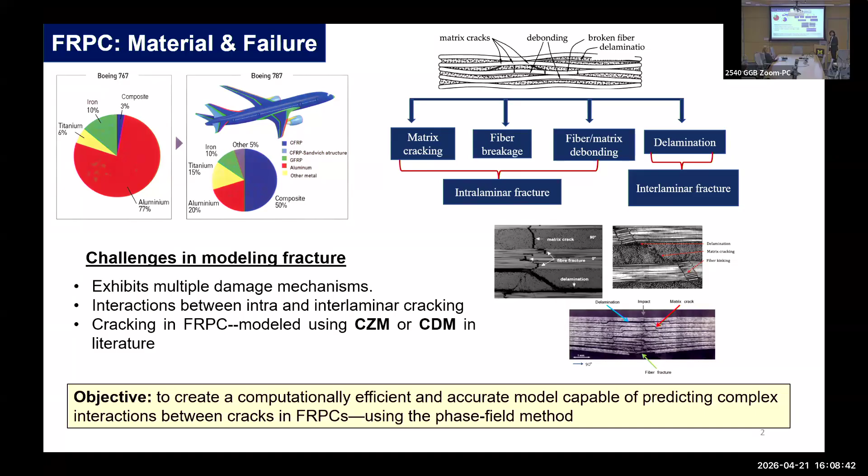So our objective in this project was to develop a computationally efficient and accurate model capable of describing all these complex features of the fracture behavior of fiber-reinforced composites. For that, we will use the phase field fracture method. I'll explain in a minute why phase field fracture is particularly suited to solve this problem.

Prior to that, let's talk very quickly about the unidirectional FRPC constitutive behavior. As you can see here, it's a schematic representation. The unidirectional FRPC, or UD-FRPC in short, has a stress-strain response that depends on the fiber orientation with respect to the loading axis.

Similarly, if you look at the fracture behavior—this experiment was done here at University of Michigan in Professor Waas's lab—they considered an open hole tensile sample with fiber oriented at different angles with respect to the loading direction. These are open hole tension samples, pulled along the horizontal direction, and you can see the crack starts from the notched edge and then propagates following the fiber path. So it's a highly anisotropic phenomenon even when the external load was purely tension dominated.

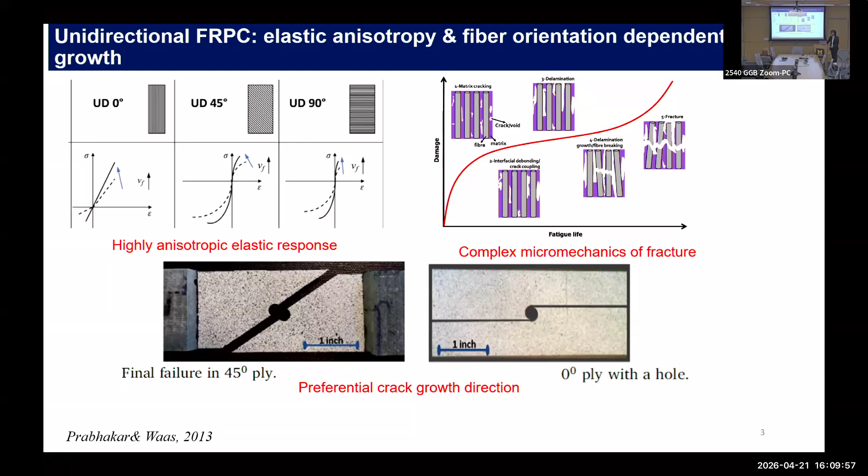Characterizing and incorporating that in a modeling environment has been challenging. Cohesive zone models have been used as a recourse, but there were issues.

So we are trying to handle some of them through this phase field approach. Before going to the phase field description of fracture, very classical inception of fracture mechanics started with Griffith's theory

of fracture, which basically states a condition of when the crack will grow in a linear elastic brittle material. It gives basically an energy balance sort of statement to determine that criteria, which states that when the elastic energy or the stored strain energy released per unit area of crack equates the material's fracture resistance, or formally known as fracture toughness, then that determines the unstable crack growth criteria. This was very simple and widely applicable to describe the fracture behavior of brittle material.

Based on that Griffith's seminal work, there have been a significant volume of work in fracture mechanics because it's challenging to deal with as the material constitutive description changes from brittle to ductile, then heterogeneity and anisotropy, etc. So I borrowed a famous quote by Professor Bazant that, like turbulence, fracture mechanics is different.

This formidable subject has been researched for a century and probably will be for another, because there are still quite a lot of unresolved issues.

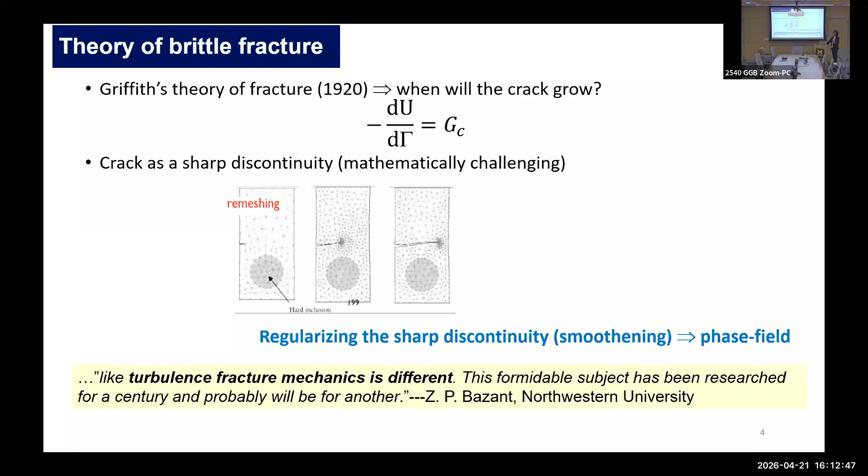And phase field framework of fracture actually lies in that domain of fracture modeling. So smoothening the sharp discontinuity, that's the core idea of representing sharp crack through phase field.

So now jumping into the core description or the theory of phase field, which basically started as a formal variational theory of fracture, and the seminal work was by Francfort and Marigo in the late 90s, who recast the Griffith's statement of energy balance in the form of energy minimization.

So if you can write the total energy of a cracked body, which contains the bulk stored elastic energy, and then a fracture energy term, which is balanced with the external work, and then if you can minimize this energy somehow, then the crack path, the propagating crack path, emerges naturally from the solution of this minimization problem.

So the two key points that we need to focus here: remember the fracture energy is described over the crack surface area, whereas this bulk elastic energy is integrated over the volumetric domain. So it's basically one over the surface area term, and this one is the bulk volumetric term. Theoretically it was possible, but numerically it was quite challenging to implement until this late 2000s work came up.

Where the description of this order parameter, which is more formally known as order parameter in the broader domain of phase field approximation, basically was introduced to describe the damage field. So a sharp crack is represented by this.

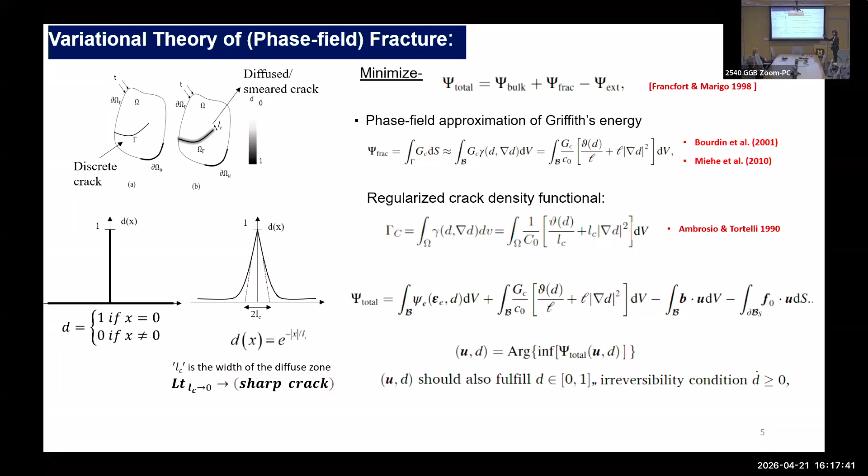Of course, along with that, this implementation further demands criteria like the damage being irreversible. No healing is possible once the crack is happening, because we are not solving any dissipation inequality here, it's just energy minimization. So there is a possibility that if we are doing an unloading, the crack can heal. So we have to impose this constraint from outside the variational principle. So this was the core of this phase field fracture theory.

Now we tried to extend the classical phase field theory to model fracture in FRPC composite. That was our sole motivation. So along with the sharp crack approximation, as I said before, most of these fiber reinforced composite materials are used in laminate forms, and these laminates often have off-angle lamina orientation. So they have fiber orientation mismatch, and that mismatch actually gives rise to this interface.

So even without any crack at the interface, just because of this mismatch of fiber orientation, there is a displacement discontinuity along those mating surfaces. Any sharp discontinuity again troubles our continuum mechanics approximation and the solution.

So what we did is, just like the phase field approximation, we used another smoothing scheme to smoothen out these sharp interfaces. So we had D priori to describe the sharp crack. Now we have beta, which is also a phase field variable. The difference between D and beta is that beta does not evolve with time. So it's a fixed scalar smoothing variable which varies between 0 and 1. 0 represents the bulk material, 1 represents the sharp interface.

So if you just think of the ideal schematic of this smoothing phenomena, you have a sharp crack in the domain and you have a sharp interface, both can be regularized by introducing the phase field variable D and beta and an associated length scale parameter. So with that introduction of beta and D, now my total energy in a regularized form for the domain can be written like this.

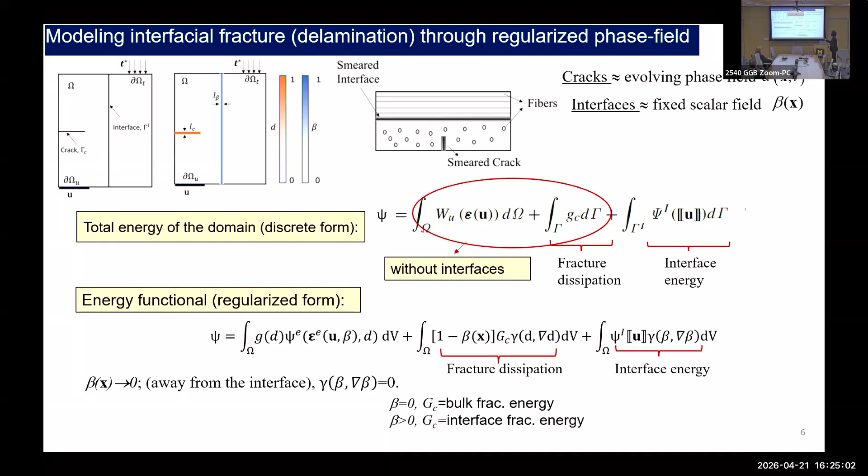So that was the interface description. In addition, if you remember in the free energy expression from a couple slides before, I did not explain this: the interfacial free energy is classically expressed based on a displacement jump, because there is a displacement discontinuity along this mating interface between two successive lamina. This displacement jump used to be the most important kinematical variable in classical theory, so the free energy is expressed as a function of this displacement jump across the sharp interface.

Now the idea we are borrowing in this phase field framework is that we get rid of all sorts of sharp discontinuity. To do that, we approximate this displacement jump across the interface using a simple trick: a first order Taylor series expansion of the displacement field across the neighborhood of this separating interface. It's fairly simple, but there's a catch: since it's a Taylor series expansion over the nearest neighborhood, we have to choose this distance h over which we do the approximation to be small enough so we don't get a very rough jump approximation.

This automatically comes because we actually smoothened the interface field too, through the introduction of the beta parameter. So we need a smooth approximation for beta anyway, which tells us we need to resolve our mesh fine enough so that this jump approximation remains accurate. So now we have a smeared crack, a smeared interface, and the jump across this interface is also smoothened out - there is no sharp discontinuity anywhere in the domain.

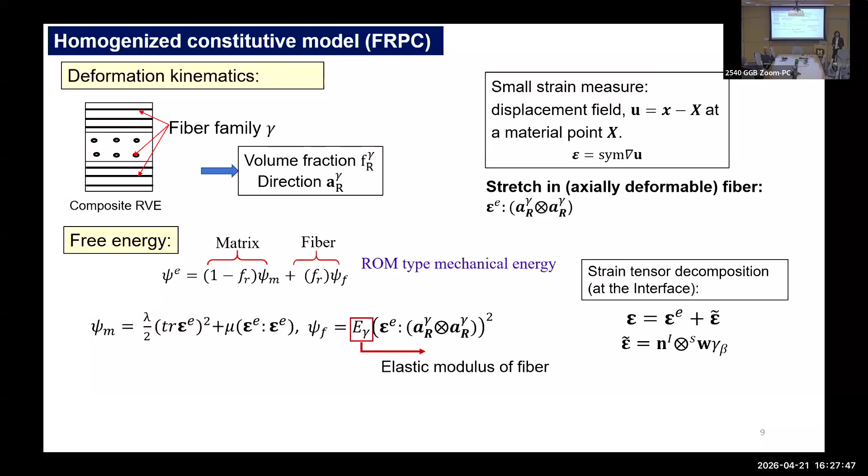With this very simple constitutive description, we went ahead and applied the variational principle to get the governing equations. So we have the classical stress equilibrium and, of course, the phase field equations.

Here we have done quite a bit of manipulation. I'm not going into the detail because you can find it in our recent papers. But again, reminding you that this 1 minus beta term basically takes care of this interactive fracture phenomena.

So if the crack traverses from bulk to the interface and then interface to the bulk again, this term is going to dictate how the fracture energy will change as the crack path changes.

And of course, remember that important constraint that damage cannot heal once it happens. So we used this history function-based approach.

There are still some unresolved questions in the phase field methodology of using this history-based approach. That is, H is called the history function-based approach. But for the time being, we are using this one because it is fairly easy to deal with.

There are other approaches, for example, Lagrange multiplier-based approaches, to introduce this constraint and make it an equality constraint, and then solve the whole differential equation. That could be another way.

So then, of course, H from the construction itself is the maximum of the history of the elastic strain energy, factored by a term which basically acts as a threshold.

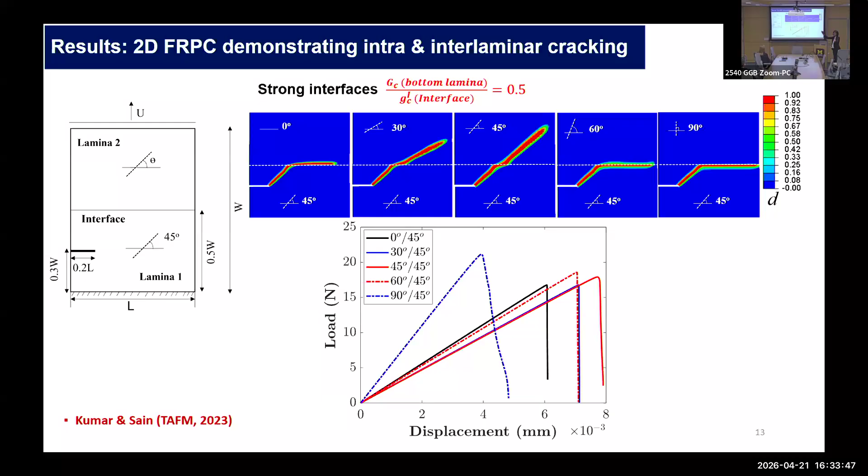So if anyone is trying to design a composite where you want a predefined crack path, like how you want the cracks to maneuver, you can probably use one such model fairly easily and design the layup to control how you want your crack to propagate in a composite domain.

So we extended our implementation for 3D geometry, because that is where you basically exploit the entire loading spectrum for realistic composite applications. We used similar geometry and similar notch locations, but tried different modes of fracture and different modes of external loading. I'm going to show a few specific case studies. For more details, you are welcome to look at our recent papers.

In this particular slide, I'm showing the case when the interface toughness is weaker than the bottom laminar toughness. You see what is happening: the crack starts at the notch tip, the damage starts at the notch tip, but it does not propagate. Instead, another crack starts at the interfacial delamination location, and the delamination continues to propagate. So delamination becomes the dominant failure mode.

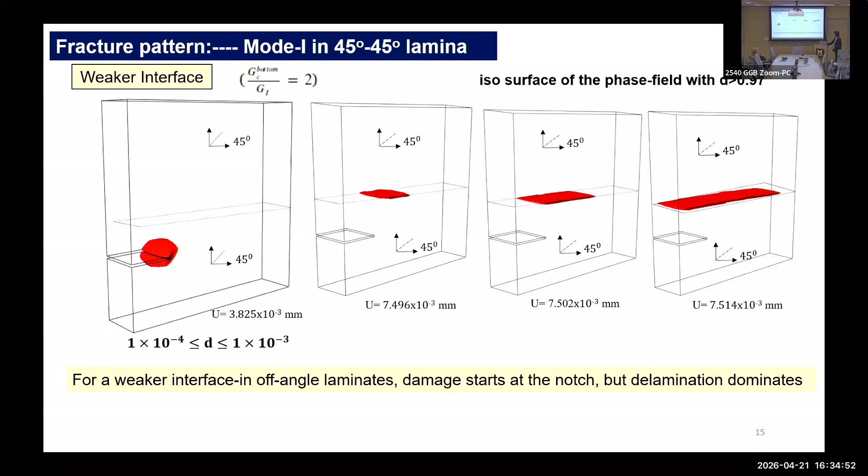So if the interface toughness is weak, then you will always see delamination, at least under this uniaxial tensile loading condition. This is mode 1 loading, okay?

However, if the interface is stronger, again I showed you some results in the 2D case. We have done the same experiments in 3D, and we have seen similar results: up until about 45 degrees, it starts from the notch tip, follows the bottom fiber orientation, goes to the interface, remains there for a while, and then follows the top fiber orientation.

But at 60 degrees and 90 degrees, it goes to the interface and interfacial delamination is favored. Of course, the resulting phenomena that we are seeing is a competition between the individual toughness of the lamina and the toughness of the interface.

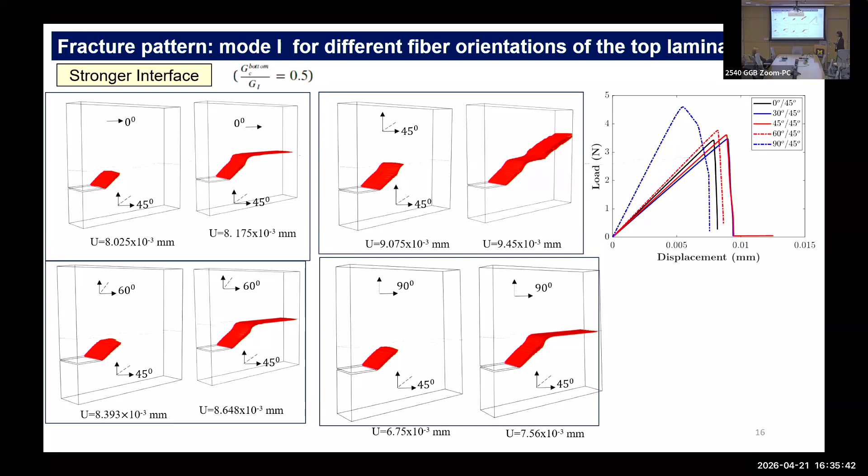Okay, so this is for other modes of fracture. Here, the top and bottom fiber orientations are both 45 degrees. What we are studying is how the crack will propagate under different modes. This one is particularly interesting.

So what we saw for mode 2, in-plane shear, is that the fracture path depends on where the pre-notch is. If the pre-notch is at the mid-plane, where the interface is, then we see pure delamination. If the pre-notch is offset with respect to the interface, then we see inclined crack propagation, almost as if it doesn't even realize the presence of the fiber. If it was pure matrix-driven crack propagation, you would have seen a crack path like this.

Now, we don't know whether this is actually happening in experiments in all cases. This requires rigorous experimental validation. We did some validation, and of course, depending on what type of fracture behavior is happening, our load displacement curve also shows significant change, which is quite expected.

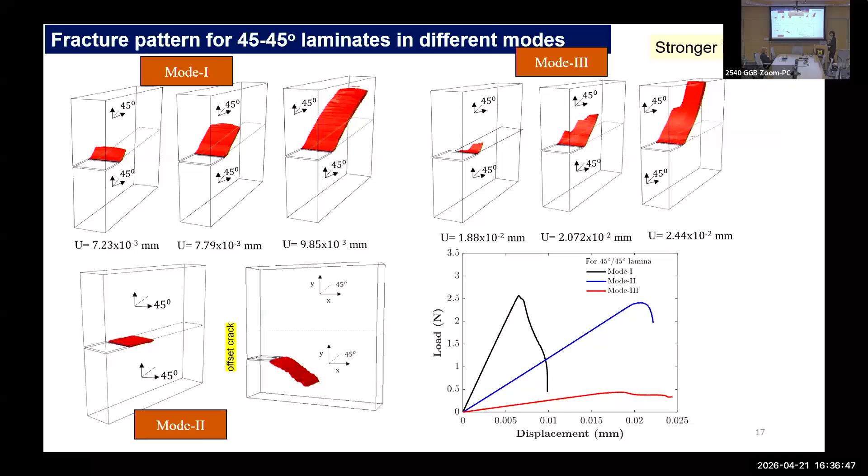So this is the part that we have already published. To give a quick summary: the anisotropic regularization we introduced in the gradient term of the fracture energy works well to characterize this fiber-oriented, preferential crack growth. The homogenized constitutive framework was used to incorporate the elasticity, and the regularized interface approximation works well to capture the delaminations.

We have done quite rigorous experimental validation in the papers. I showed you the OHT experiments before. We have also done some interfacial delamination experiments like the DCB or end-notch fracture experiments reported in the literature, and our model predictions agree fairly well with the reported experiments. These are the papers where you can get more details on this part of the work.

Now I am going to switch and show you the recent modifications that we are thinking of doing. This part of the work is not published yet, it's under review.

The first change we are going to do is the constitutive description of the lamina. Instead of using that homogenized, axial stretch dependent behavior for the fiber kinematics, we are going to look into a more orthotropic sense of the constitutive behavior. This is bread and butter for the composite community, right?

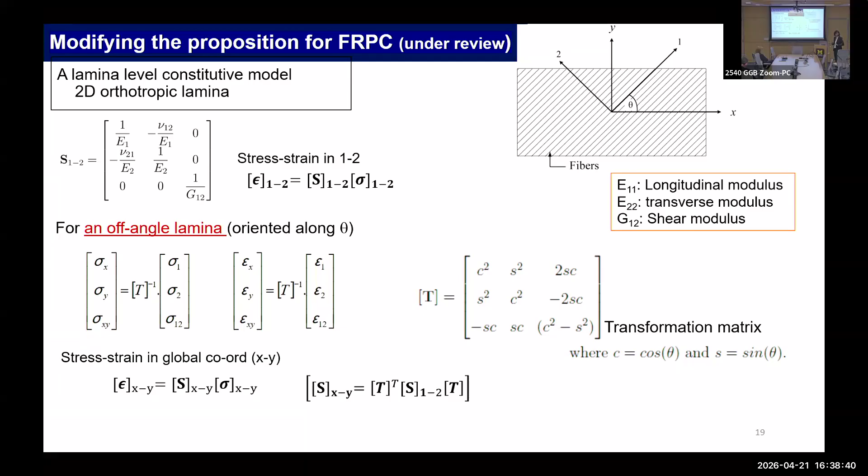So in 2D, this is what the elasticity matrix looks like in the local material coordinates. One is actually the longitudinal or fiber direction. Depending on theta, you can do a simple stress-strain transformation to get the global stress-strain equation in the Cartesian coordinate system. That's what, as I said, in lamination theory people keep doing.

In addition, to calculate the driving energy for the phase field crack growth, we did some modification. What we are trying to say is that we know the crack propagates along the fiber direction, even under pure tension-dominated mode.

If we think the crack is to propagate under a pure mode 1 situation, then from classical fracture mechanics concept, we know that the stress perpendicular to the crack path is responsible for driving the crack. So if the crack has to propagate longitudinally under mode 1, the mode 1 driving energy should depend on the transverse stress.

We can simply write down a strain energy density based on the transverse stress and the transverse modulus, like this. Similarly, if the crack is to propagate under mode 2, then the shear stress and the corresponding shear modulus will be used to compute the shear energy part, or the mode 2 energy part of the driving force.

Of course we have to have these criteria to ensure that fracture happens only in tension-dominated situations. For the shear case, it depends on the principal stress calculation: if our major principal stress is greater than 0, it will be a non-zero term, otherwise it remains 0.

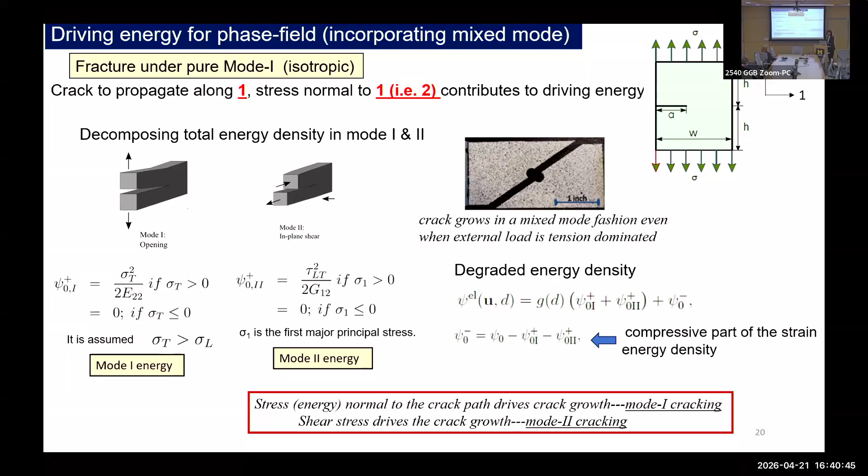With this, we went a little further. Along with quasi-static fracture simulation, we wanted to see what happens in dynamics, if we have high rate loading, impact loading, which is what composite people are often very interested in. So we basically implemented the system in the kinetic domain.

So we have a kinetic energy term in the total energy of the system. Remember what we changed here—recap—we did not introduce any anisotropic tensor in the description of the phase field fracture, which was done in the previous part of my work. That was not done.

We have a new history function because now we have two parts of the free energy, or elastic energy: mode 1 and mode 2. They are individually compared with respect to the two modes of fracture toughness to get the driving energy. So these were the changes done in the phase field setting of the work.

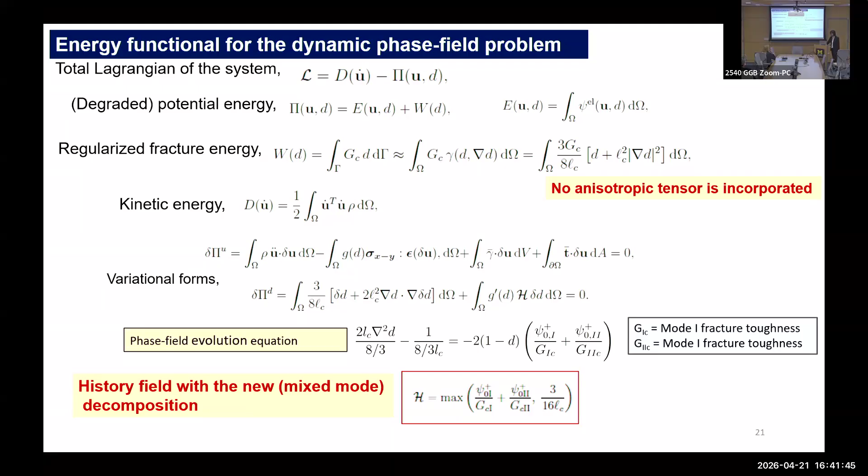Then, of course, we implemented—and I did not mention this in the first part—the numerical implementation still uses the Abaqus platform for the solver. We write a user elements routine, and for dynamics we use a Newmark beta algorithm. Those of you familiar with phase field literature know we have used a staggered implementation.

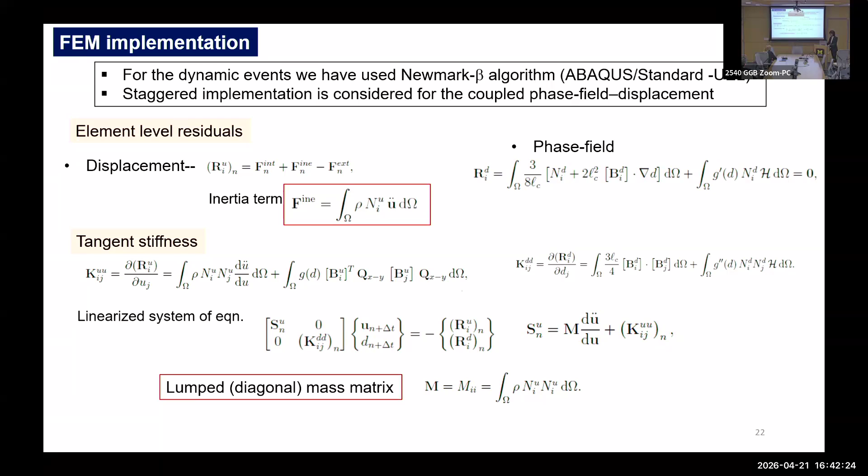I'm not going into the detail of the numerics here. The staggered implementation—basically, if you look at the whole potential, it's non-convex between U and D, so a global minimization is often very difficult to do, which is why we do the staggered implementation. If there is interest, I can talk more about that.

But then again, going back to the validation originally—I'm referring to Professor Waas's work quite a bit in this talk, because that was our benchmark problem, since all the material properties were listed in the papers.

It was very easy. When we went to the orthotropic description of the lamina, it was fairly easy to just use their material constants directly. I did not have to do any calibration, except the two fracture toughnesses. Those of you familiar with the phase field literature know the fracture toughnesses—basically the Ambrosio-Tortorelli type approximation used in the regularization of the fracture term—requires the fracture energy to be calibrated if we choose a specific length scale parameter. So either of them you can choose.

You can actually let the fracture parameter come from the experiments, and calibrate the length scale LC. But then you have to control the mesh dependency, because LC is used to resolve your crack surfaces, so it will depend on mesh size. Here, what we did is fix the LC depending on the mesh size. If we have a fine enough mesh, we can fix the LC and then calibrate the two toughnesses—that's all. Once we have that, our models are fairly accurate in predicting the experimental response across fiber orientations, and so does our predicted crack path, which matches the experiments fairly nicely.

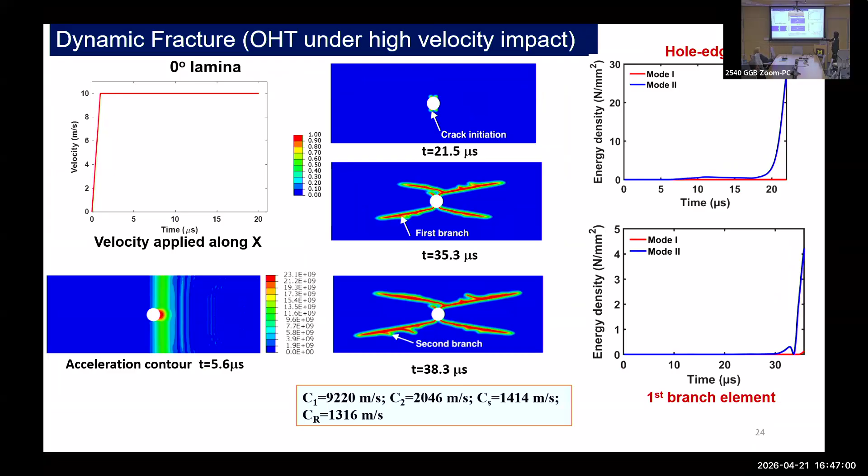So this is a compressive wave coming down, right? Yes, and it turns around, and that's when you see the crack. So when it goes here, the wave has reached around 5.6 microseconds, but there was no crack growth at that point. It goes and then comes back around this time period, and then you see the crack initiate. Yeah, you're right.

We continue doing this with a Kalthoff-Winkler type geometry. This is a classical example of dynamic fracture in isotropic material. Here, the idea is you have a specimen with two notches on one side, and you impact it with a compressive wave—a high velocity impact—between these two notches. To exploit the symmetry, we just model half of it, and consider different fiber orientations to see how the crack propagation changes.

So again, for the 0 degree case, we see that there is one single crack propagating horizontally. If we look at the energy spectrum or the local stress behavior, we see that it is purely shear driven, or mode 2 driven crack growth. So again, fiber matrix delamination is the dominant mechanism known for this 0 degree lamina.

If we try to characterize the crack propagation velocity by tracking the tip as it moves, we see that 5,000 meters per second is probably the unstable crack growth velocity, which is way higher than the shear wave speed in this particular composite. So yeah, we did not see any branching.

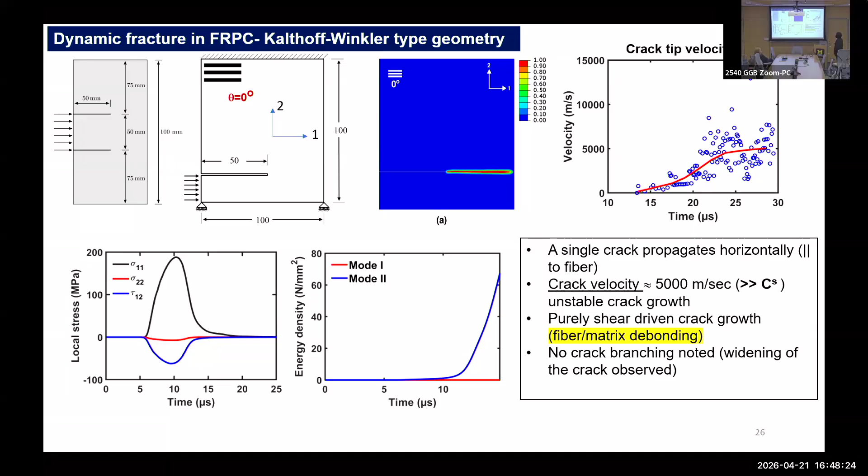Why I report that we did not see branching is because the moment we change the orientation to 90 degrees, we now see a significant amount of branching happening as the crack tries to propagate horizontally. Same boundary conditions, only the fiber orientation is perpendicular now. We see that the velocity of this horizontal crack tip has dropped quite a bit compared to the 0 degree case. Branching tries to happen parallel to the fiber direction.

We saw precisely that the first branching happened when the compressive wave went out and came back to this point. Here is the acceleration snapshot and the corresponding phase field evolution. When the first wave hit here, we see very minimal propagation as it continues. Remember, this part is purely shear driven, so the propagating wave is essentially compression. No normal crack, just shear.

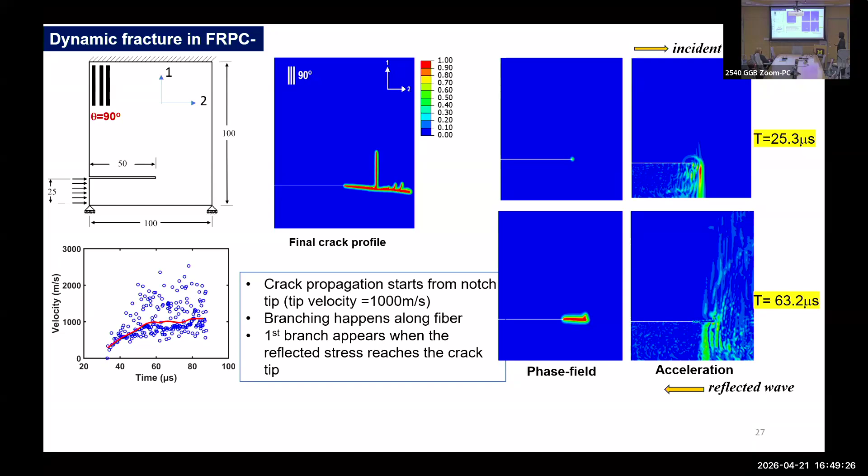But then when it comes back, I'll show you the energy spectrum now. Look at the element at the pre-notch tip and the element at the first branch tip. If you look at these two energy plots, you'll see it was more mode 2 driven at the beginning, as I said, shear driven. But when the reflected wave came back, we saw a mode 1 spike in the energy plot, and that is when we saw this vertical crack start propagating.

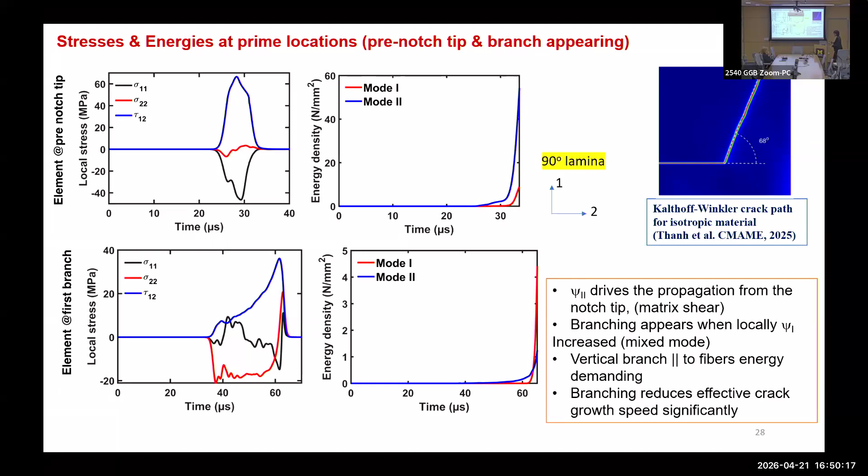First branch appeared. Just for reference, in the literature there has been quite a bit of experiments on Kalthoff-Winkler experiments and simulation. In an isotropic material, with the same boundary condition and same geometry, the crack propagates in a pure shear driven manner like this, just to give some inference as to what happens in the regular isotropic geometry.

So everything basically falls to exactly the same conclusion that we're seeing in the crack propagation behavior also. If we look in more detail, the overall conclusion tells us that 90 degree lamina basically shows or demonstrates more stable crack growth.

If you compare with the quasi-static situations, I'm not sure if you paid enough attention since I was rushing through quickly. In 90 degree lamina, the quasi-static response was not that impressive. 0 degree was much stronger because we were pulling along the fiber direction, but it looks like in dynamics, it might behave a little worse than the 90 degree case.

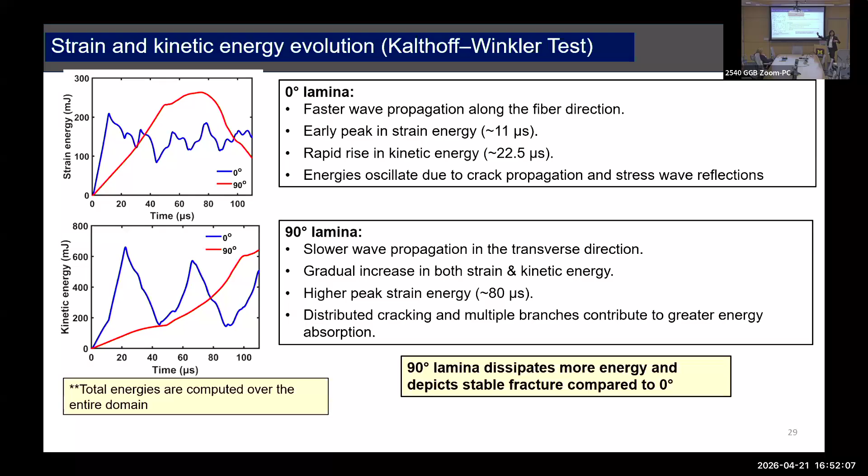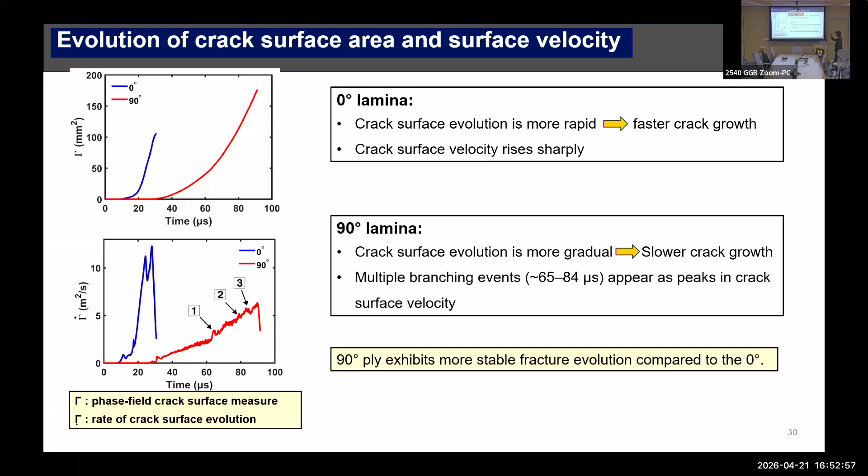So this was basically the comparative study of these two composites, and then we can even calculate the dynamic energy release rate, again from the sense of Griffith. We have all the energies and we can actually compute what the dynamic energy release rate is going to look like, for the 0 degree and the 90 degree case.

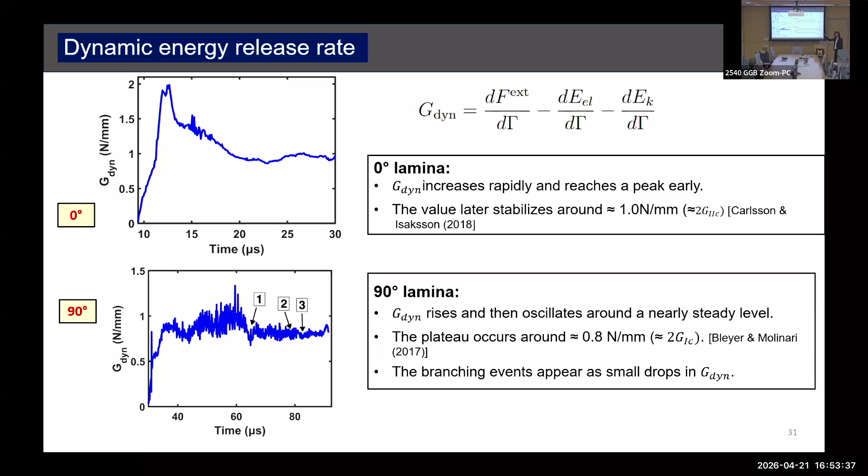As I mentioned before, the 0 degree case spikes very quickly, comes down, and then becomes stable. For the 90 degree case, it was more oscillatory with a much lower value. It doesn't gain as high as the other one, but it was still showing some dip in the energy plot, corresponding to branching events.

So how much time do we have? Probably 2 minutes. Okay, so we continue to do more experimental validation. This is another experiment we looked into, done by a group at Caltech, led by Professor Rosakis. They have a laminate in one particular fiber orientation, hit it with a steel impactor on one side, and monitor crack propagation under symmetrically and asymmetrically impacted specimens.

We saw the behavior match qualitatively, even though our model does not yet show a very good quantitative prediction. We have identified reasons for this. One is that in the experiments, they have not reported multiple crackings, but we are observing more than one crack propagation. Every crack demands some energy, so whatever we are tracking gets distributed among 3 branches in our case, while they only saw one major crack propagation. We did not try to constrain the damage anywhere in the domain, letting the simulation do whatever it does to see where we stand in terms of prediction.

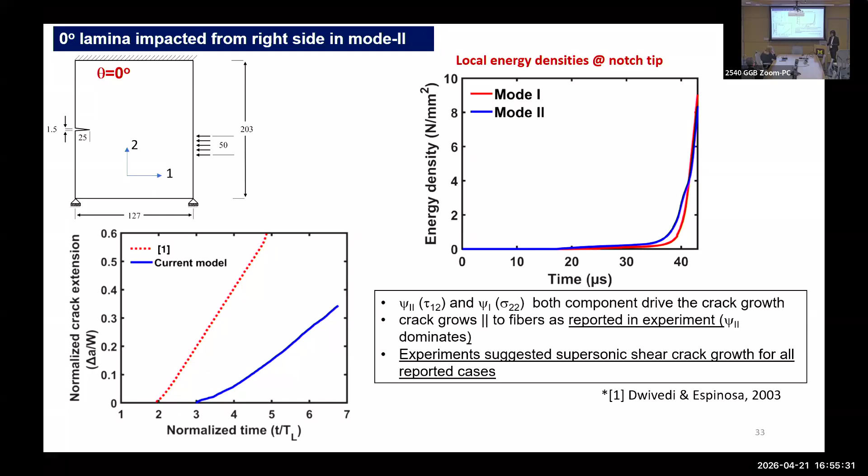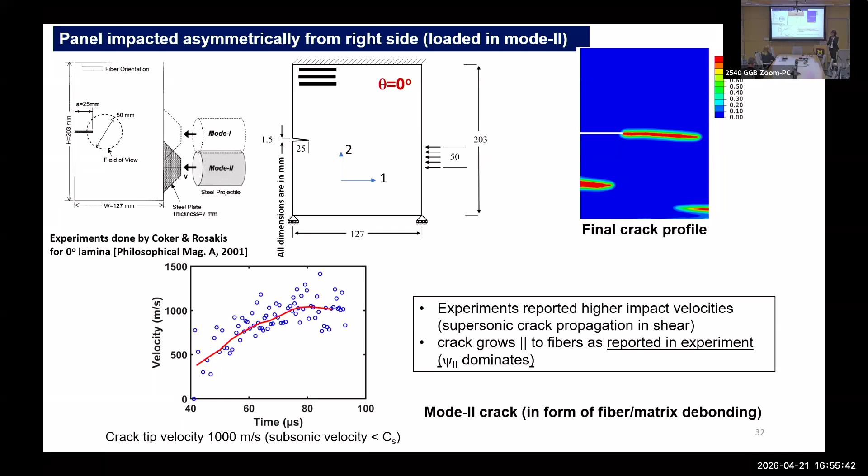There is also modeling published in 2003 where they used an elastic-plastic constitutive description at the lamina level. Our constitutive description is purely linear elastic, so there is no dissipation from plasticity, which is probably another reason we're seeing slightly slower crack growth. We don't see why it shouldn't work if we can constrain this part of the damage initiation—probably we can get a better prediction. We have to work on that; I'm not claiming anything before doing that.

I'll jump to the conclusions since we don't have enough time. The second part summary: we used a 2D lamina level constitutive description combined with a new energy decomposition based on local stress description to capture anisotropic crack propagation. In this case, we do not need to incorporate anisotropy in the phase field regularization, so we can get rid of that anisotropic tensor and the scalar variable associated with it. We see that dynamic crack propagation can be captured really well, which is inherently complex.

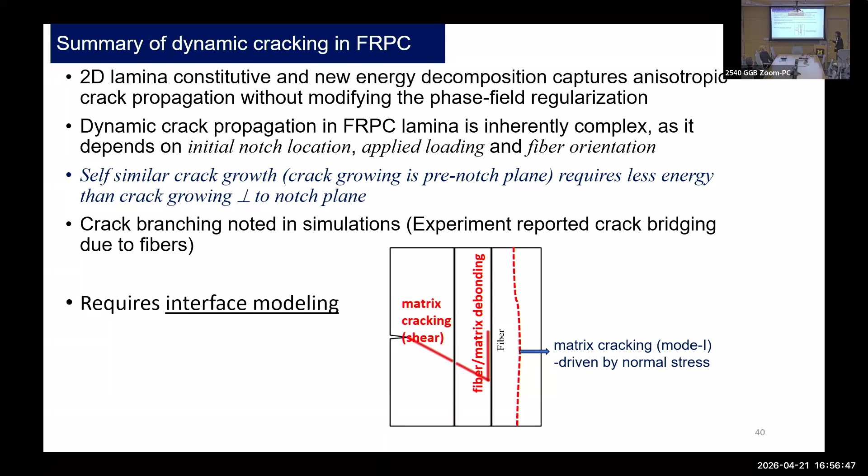As you can see, the crack path changes considerably from case to case, as a function of initial notch locations, applied loading, and fiber orientations. I'll leave it here, but there are some questions on this branching phenomena, whether what we are seeing is realistic or not—that's what we are focusing on. I'll leave it up to here to take any questions on this simulation of the Kalthoff-Winkler experiment. Thank you so much for giving me the opportunity to talk about this part of the experiment.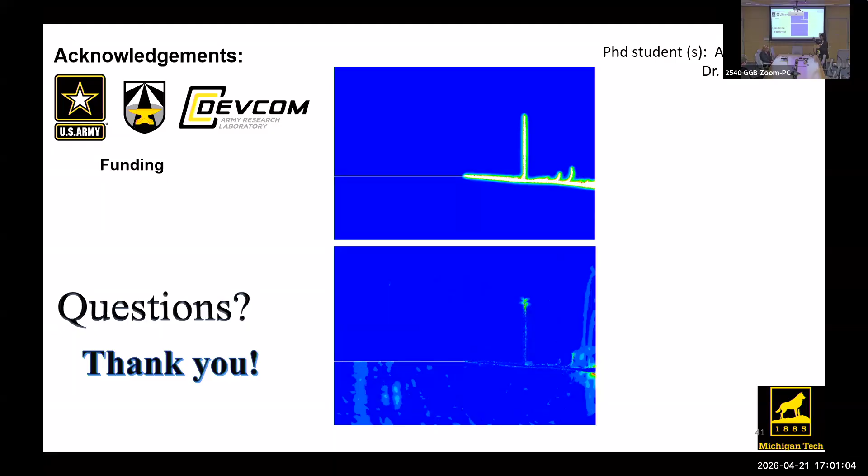Hopefully it comes out within the coming months or so. But you have to make sure, because these fracture events are time sensitive, you choose extremely small time increments so that you do not miss these events. So as long as you stick to what we are doing, it should not change - it's repeatable.

Could you go back to slide number 23? I think that was the study part - slide 23, right? Let me go out of this video. I was trying to understand what does it mean, model versus experiment, for matrix cracking and fiber matrix.

Very good question - I didn't show you the result of where we got this from. For each dynamic case I was showing the local energy spectrum. If you look at the energy spectrum locally, for this case it is psi1, the mode 1 energy, that is driving the crack, meaning it's essentially matrix cracking. Similarly, in the 0 degree case, if I look at the local energy, I see it is psi2, which is the fiber-matrix debonding - that is the micromechanics. So with this approach, you not only know the crack path or load-displacement curve, you also know the underlying mechanism.

Of course in OHT you know the underlying mechanism because it's simple. But for many dynamic cases, just looking at the crack profile, you probably don't know what mechanism caused the failure or crack path. But if you look at the energy spectrum locally, you will know whether it was mode 2, mode 1, or a mixed mode scenario.

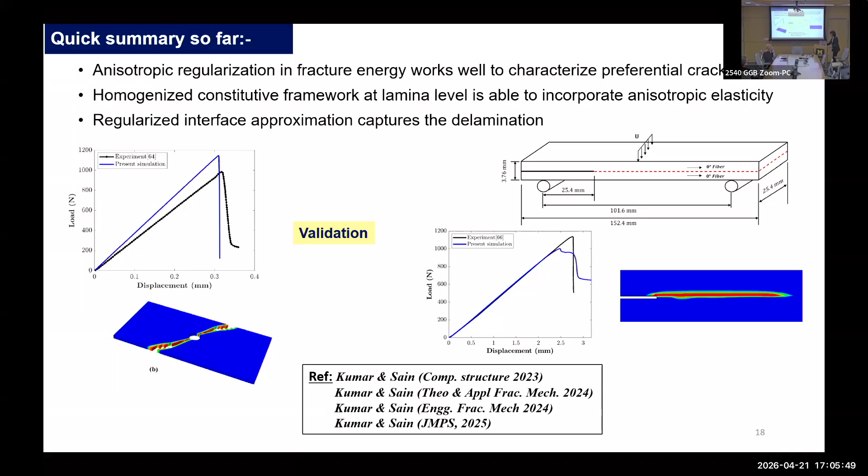So the experiments that Professor Waas's group were doing, and our assumptions of this lamina - this one, for example, they had the laminas oriented through the width of this sample. So it's just like one long string, going from one end to the other, continuous, and they don't twist up or do something like that.

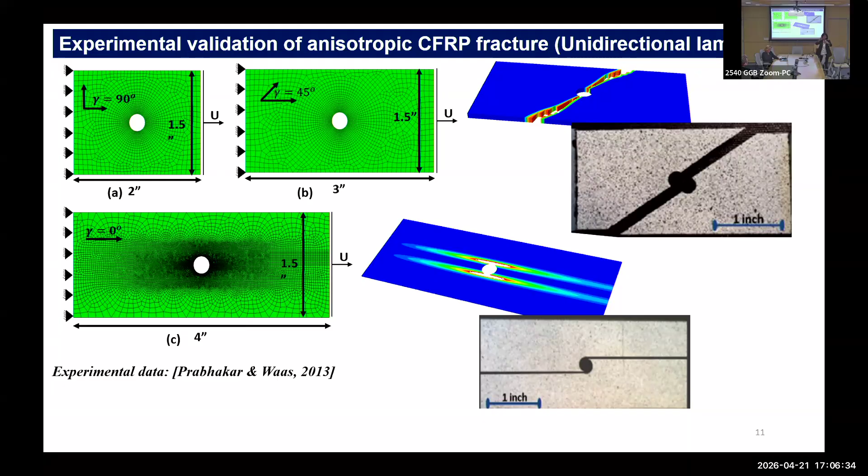So there are other microstructures available in composites - they do weaving, they do twisting. Pre-twisted fibers are introduced to give more strength in the composite, so those are very complex microstructures. But in this case, you can just look at the cross section - I think I have a schematic here - and they actually look fairly like this. If you look at the cross section, this is how it will look. So those dots are the fibers.

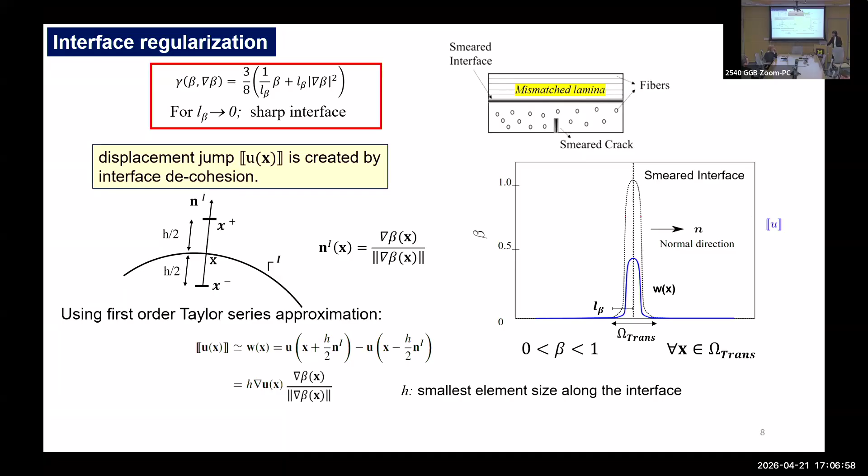And the volume fraction you're interested in is 0.6? So that was the volume fraction reported, 0.6. In the constitutive description, yes, that's somewhere in the table. I think that was reported.

For this one, I think this was just our parametric studies, because if I remember correctly, Tony's paper had a slightly higher volume fraction - I don't exactly remember the data. This one was just the parametric study, but for the first part of the model you can actually choose the volume fraction for your actual sample. If you know the volume fraction of the fiber, you can calibrate that, because our free energy is expressed in terms of volume fraction, so it's a parameter in the model.

I see, okay, thank you. Sorry, go ahead.

So you use the sort of smoothing method to smooth the crack itself and also the interface between the different layers or lamina of the composite. Could you use that sort of method to apply it to the discontinuities between the fiber and the matrix? Yes, I assume there is some sort of discontinuity, because the material properties are so distinctly different.

Yes, you can do that, but imagine that around each fiber, if you define the interface, it will be computationally expensive to capture that. But theoretically it can be possible, and we did some simulations.

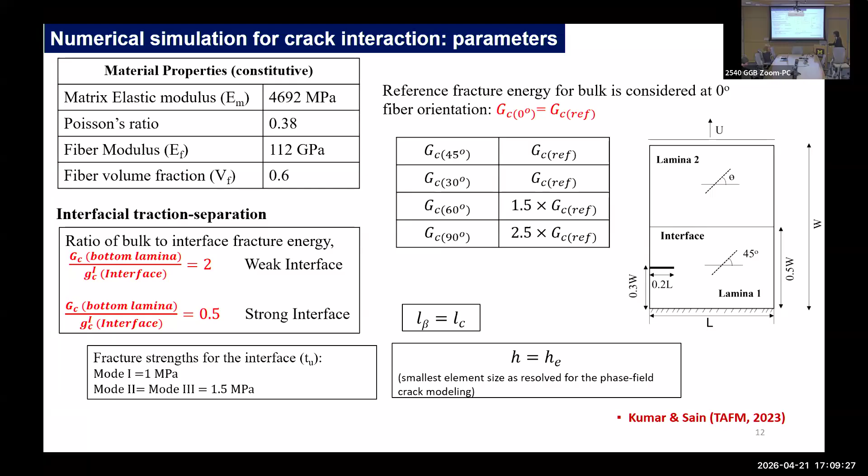Very good question. What we did here so far is, I would say, a little crude, in the sense it's exactly the idea of AT1 calibration. For this particular presentation, we made sure that along the crack path the mesh is uniform in size for these three devices, so you have a small enough mesh size that the element size across these three specimens is the same.

Then we had the advantage of choosing LC as a constant across these three specimens. But then you fix the strength. Yes, but then I fixed the strength, which is why I had to calibrate the fracture energy to match the strength, and then to match GC. That is why you'll see I get one very good approximation, but these two are not matching on top of each other, even if the strength matches - it just shifts, the activity shifts.

So this is one of the questions a reviewer asked: can you get a little more, better control here? But if we just stick to AT1, we cannot - that's the inherent limitation of this. There is a way, if you can incorporate this into your free energy as a parameter, to make the simulation length scale insensitive. But this results in a different model.

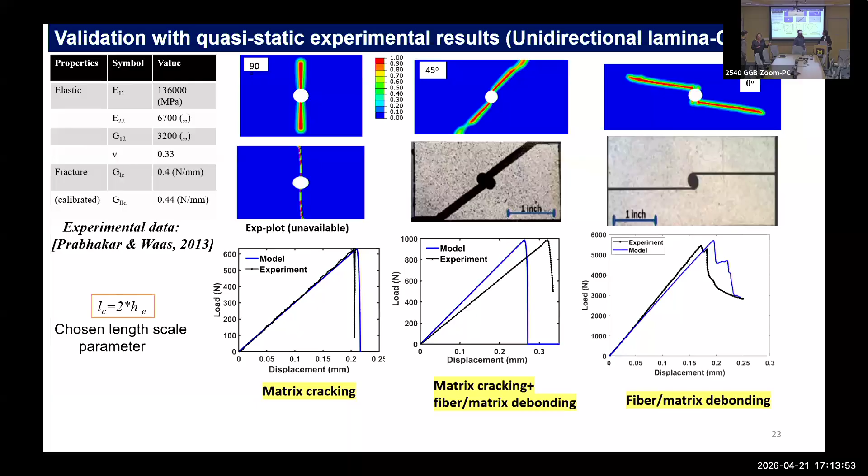Then you must be knowing Joe. Yeah, I mean, I took continuum mechanics. Yeah, that was a tough course. Very horrible experience during that time - somehow I got a B. I can share it with you. Oh okay, yeah, but it was very tough.